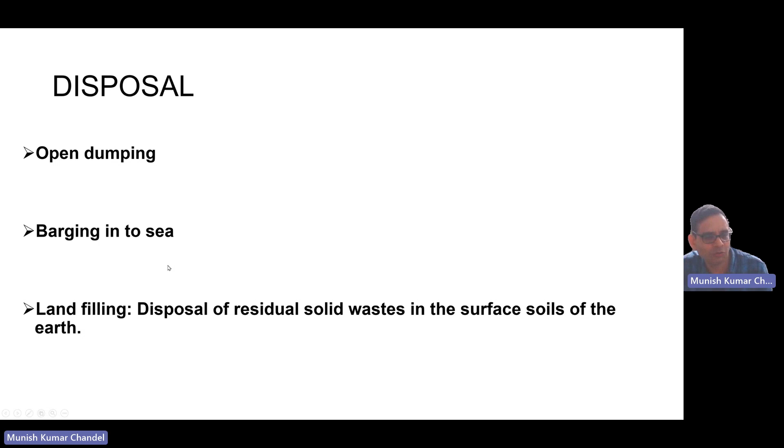But imagine you're not doing much recycling, you're not doing composting, etc., for several reasons, because the waste is not segregated. So many times you have to landfill or dispose the waste, but you cannot do open dumping, you cannot put it into the sea. Therefore, you adopt landfilling. Why landfilling is very clear, because open dumping causes all kinds of problems, all kinds of emissions, etc.

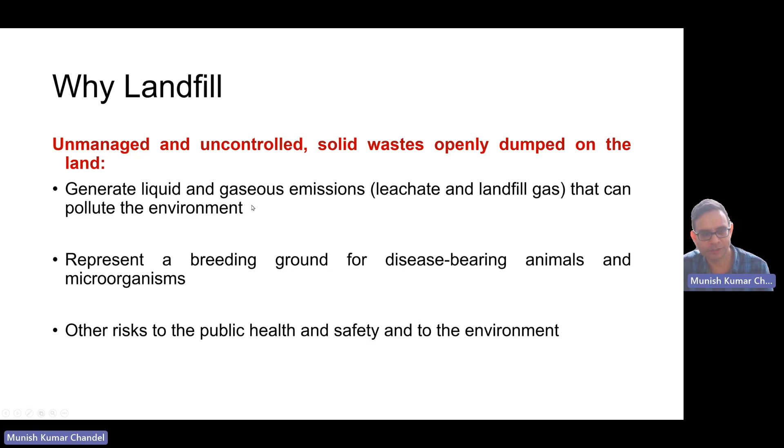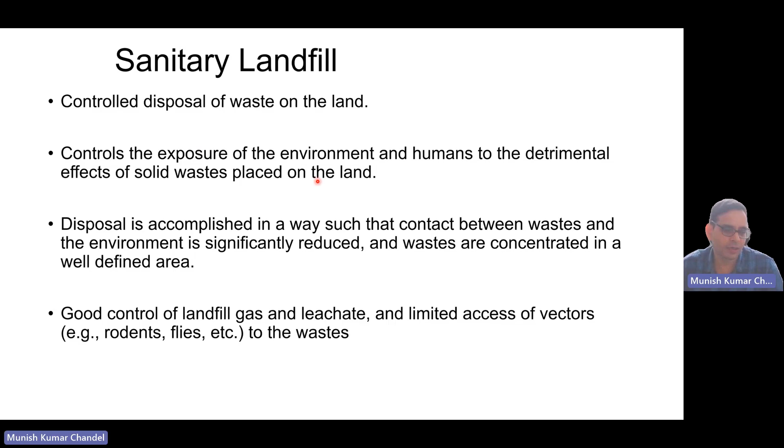Landfilling is a scientific method of disposing waste into the land. As mentioned here, it's a controlled disposal. That means you're not simply dumping it, but you have a control system which controls the exposure of the environment and humans to the detrimental effects of solid waste placed on the land. It is done in a manner that there is least contact between the waste and the air environment, water environment, humans, and other species of the ecosystem.

Okay, so let's see what it is. Think of an open dump. What happens in an open dump? You put waste into an open dump. It leads to the percolation of water, maybe rainwater, and it leaches out, and that may pollute your groundwater or other nearby water bodies. So that is one problem. Then there may be emissions to the atmosphere, causing air pollution. That means there are gases going to the atmosphere.

To control that, you have a liner system at the bottom of your landfill, to avoid any kind of leaching going to the groundwater or water bodies. And then you have a cap system. That means you close it on the top so that these gases, some of which could be toxic and harmful to humans and other ecosystems, will be captured or capped.

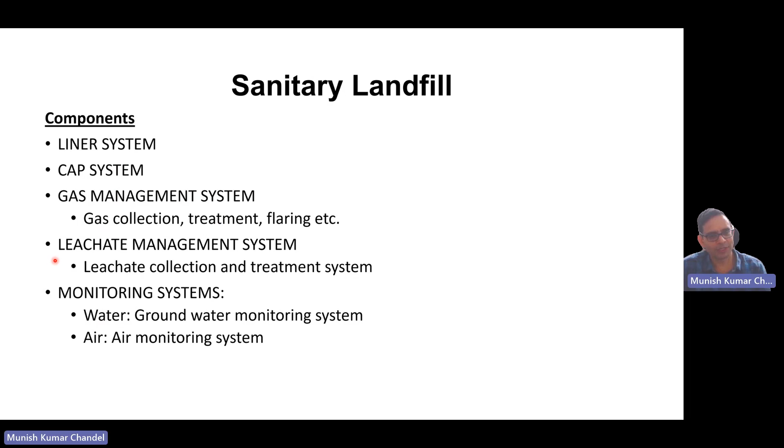So therefore, what are the different components of a sanitary landfill, which is a scientific method of land disposal of municipal solid waste? You have a liner system, you have a cap system, you have a gas management system, you have a leachate collection or leachate management system consisting of collection and treatment. Then you have the monitoring system.

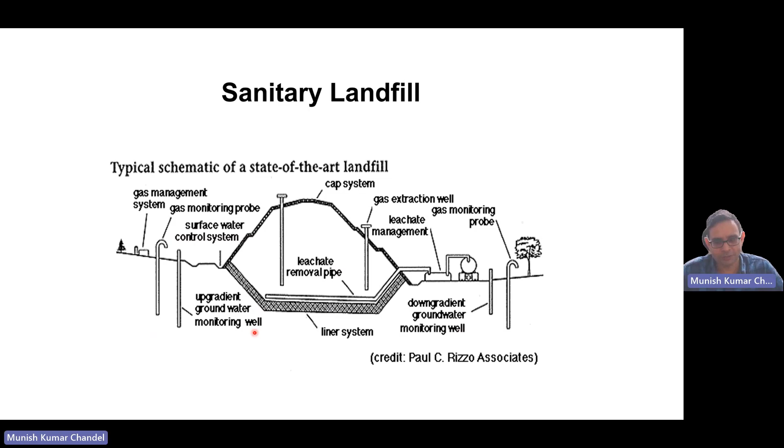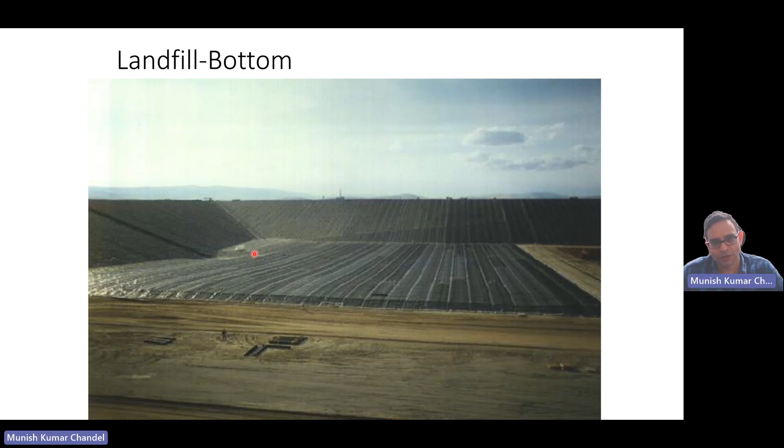And there are gas monitoring systems and gas management system and groundwater monitoring wells upstream as well as downstream to know whether this landfill is contaminating groundwater or not. So this is how it looks like. This is the liner. This is a typical landfill operation. You are trying to fill the waste here. This is what a beautiful liner would look like. You would put the leachate collection system on the top of it, and then you will fill the waste.

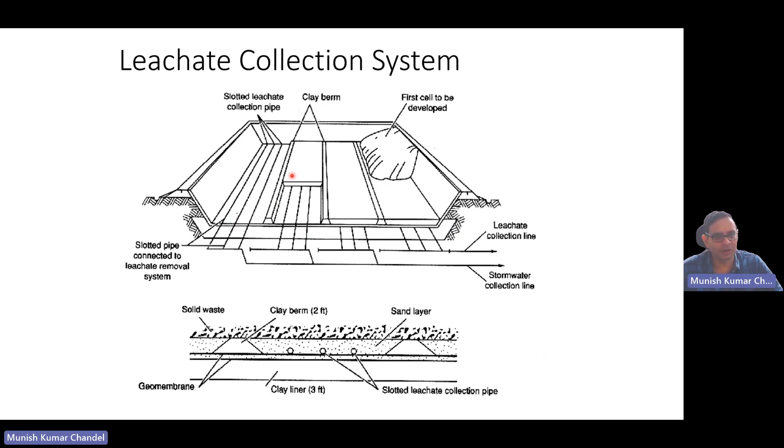Another thing you have to also know is that when you do a landfill operation, you are not fully filling the whole landfill in a single go. So what you do is you fill your waste in terms of cells. For example, if you have a big landfill which can take the waste for, let's say, at least 30 years, you start to fill in one part of it. Maybe you put a cell, and you put one day's waste and then another day's waste and so on.

And then you first fill it up to one lift. And once the one lift is there, you can do the second lift and the third lift. So it will depend. One lift could be up to 5 feet or 6 feet or even more than that. It will depend how you have designed it.

And there is a daily earth cover required, because once you put the waste, even if you compact it, you need to cover it with some kind of soil so that there are no foul or flue gases going and contaminating the nearby area, or birds and animals intruding into your system. And especially in rainy season, you have to cover it with temporary covering, because otherwise it will be filled with water before you even use it.

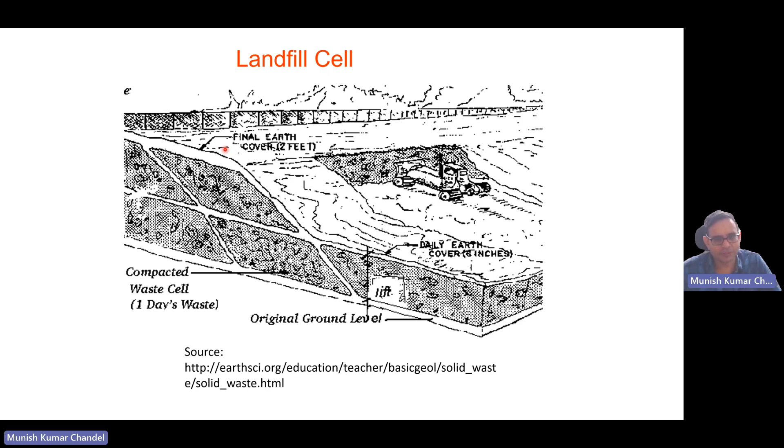So basically, the point is that you fill it in cells. There are daily cells, then monthly cells. You have one lift and then two lifts and so on. Okay. Then, as I mentioned, you need to collect the landfill gas. There are different ways, but this one is a vertical piping system for landfill gas collection.

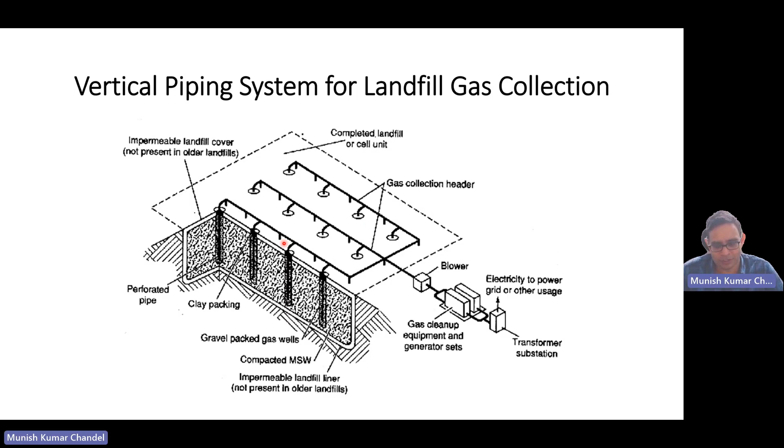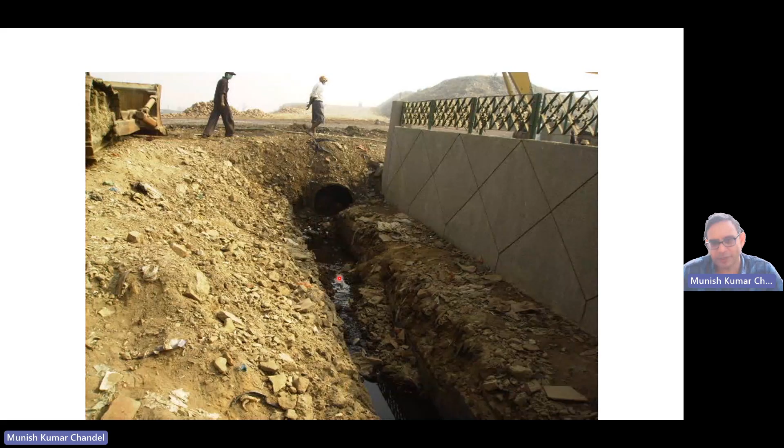This is how the leachate coming out of a landfill looks like. You can see it's really a very highly contaminated wastewater. This is a real picture of a leachate well, which is taken on the site. So once this leachate is collected, you have to treat it comprehensively.

And what is the meaning of treatment? Basically, it's a high concentration and highly contaminated wastewater. So you have to put a proper treatment plant. I'm sure you must have understood about the wastewater treatment plant in the other parts of this course. So you have to put this kind of system. This is a sequencing batch reactor, or SBR kind of wastewater treatment plant for leachate treatment in a sanitary landfill near to Mumbai.

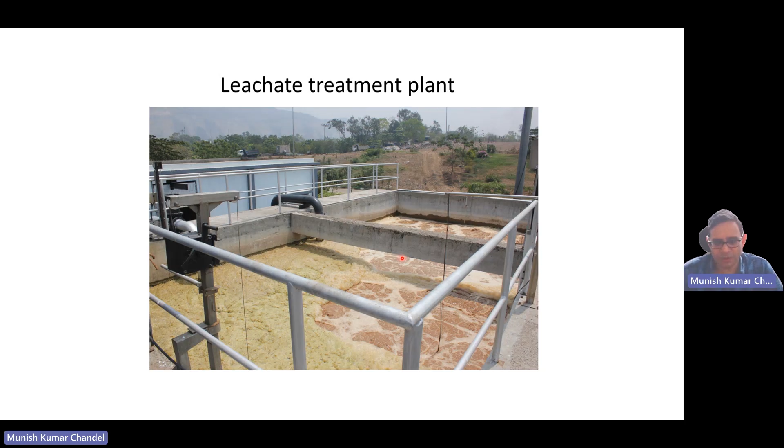So what we do, we collect the waste. We have a bottom liner. We put the waste. We have a leachate and gas collection system. We cover it. We have a cap system on that. After that, once the landfill is filled, we have to take the post closure care.

What is the post closure care? You have to ensure that there is no leakage, there is no leachate going to your surface or groundwater. Your flue gases or the gases from landfills are properly collected. So you have to monitor it for a few years, typically you can say 30 to 50 years, until it's totally stabilized. In India, at least you have to maintain it for 15 years.

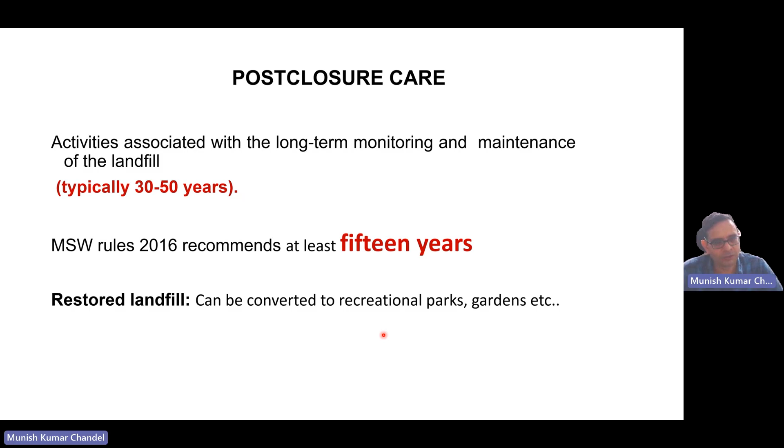After that, these landfills can be restored or converted to recreational parks, gardens, or can be used further for some other applications. So this is all I have to tell you about the land disposal or sanitary landfilling.

Now, I just want to summarize how the whole waste treatment and waste disposal is done. So imagine that you are bringing waste, which may be in some cases a mixed waste, commingled waste. So you can have a mechanical sorting system where we talked about several sorting mechanisms, physical sorting methods. So you can separate it into recyclables. There would be some rejects which cannot be recycled, and we do not find a good application for them. So they will be going to landfills.

And then the other component, which is biodegradable, can go to biological degradation, maybe anaerobic, maybe composting. And if it's anaerobic digestion or degradation, then it will produce biogas, which can be used as a source of energy. It will produce liquid, which can be used as a soil conditioner or as a kind of fertilizer or replacement of fertilizer.

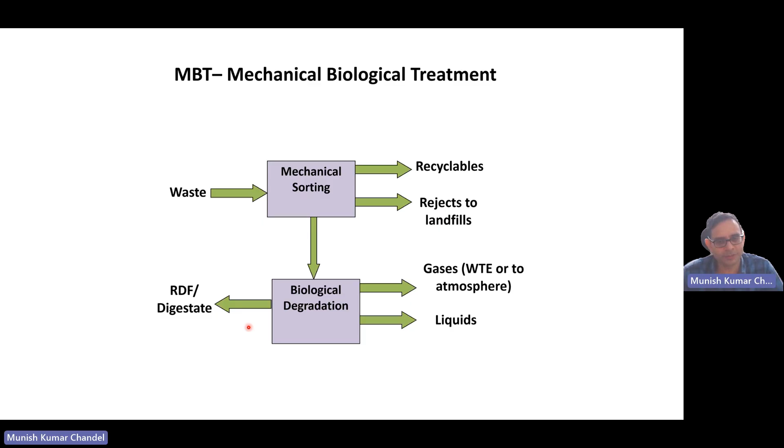And the solid component again can be used as compost or can also be used as a refuse derived fuel if the moisture content is low, and it can be sold to any cement industry or any other industries which are interested in that. So this is how a mechanical biological treatment system looks like.

You take waste, you have sorting cabins, maybe manual and maybe some machines, trommel screens, and then magnetic separators, etc. You take recyclables, you sell them in the market. You have biological processing. You further process or refine it, produce energy, produce compost, and the remaining residue will be going to the landfill.

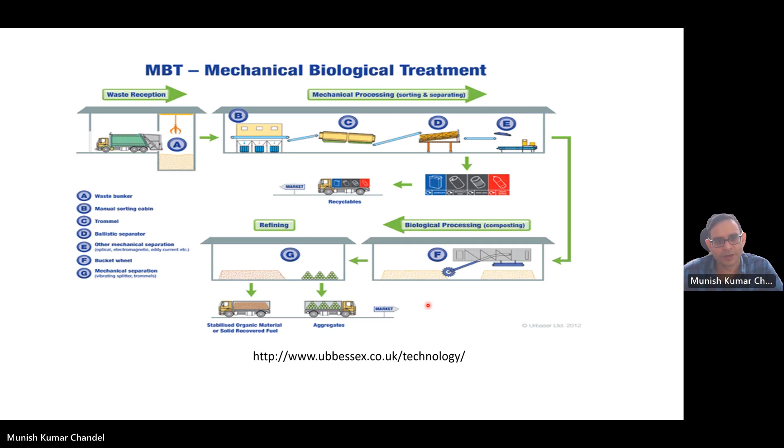In your treatment options, you do not have a single treatment line, but there could be n number of options: decentralized, centralized, having a combination of material recovery facilities, MRF, biological treatment systems, incineration, then sanitary landfills. It varies on a case to case basis, and you will find that there are several ways of treating it, but fundamentally one, two, or many of these processes in combination are used for treating or transforming your waste, and whatever minimum residue is left needs to be sanitary landfilled in a scientific manner.

And the more we segregate our waste, at least into wet and dry, our overall treatment will become cheaper and efficient, and therefore there will be very minimal waste going to the landfill, and we can have maximum recovery. So with this, I would like to stop here, and this is all I have to tell you about the treatment options and the landfills.